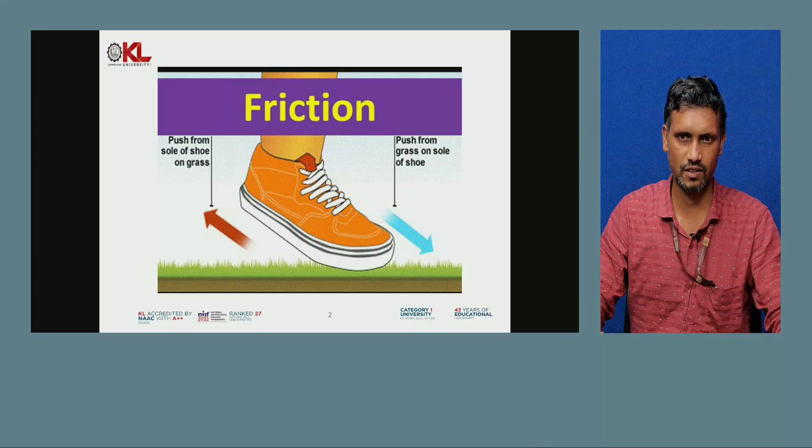Okay, so this is one of the best examples. When you are wearing shoes and moving, what are you actually doing? We are pushing on the earth. Push from grass on sole of shoe, push from sole of shoe on grass. One is action, another is reaction. You are pushing on the grass and in return you are getting a reaction from the grass on your shoes. One is action, one is reaction. Now because of this there will be friction.

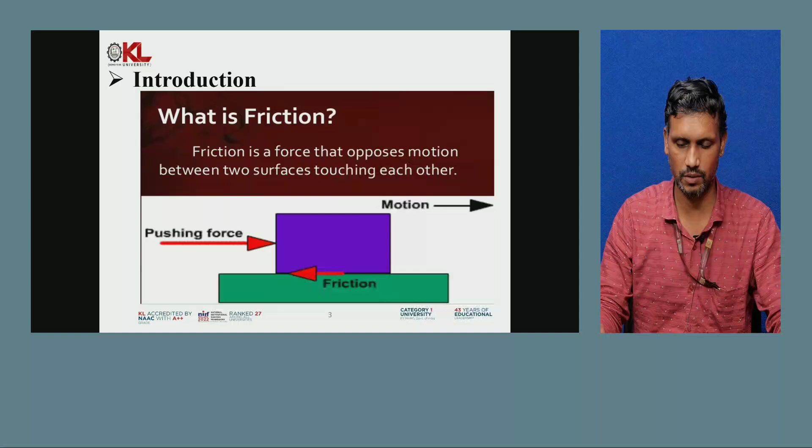Okay, now the cause of friction: it can be due to irregularities, ups and downs, rough surfaces, correct? Surfaces are generally not smooth in reality. There are some ideal conditions which we take for analysis, but actually nothing is smooth. There will always be a little irregularity.

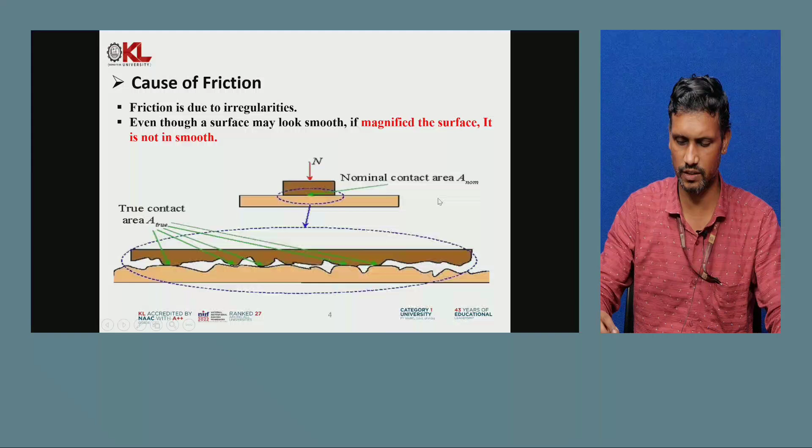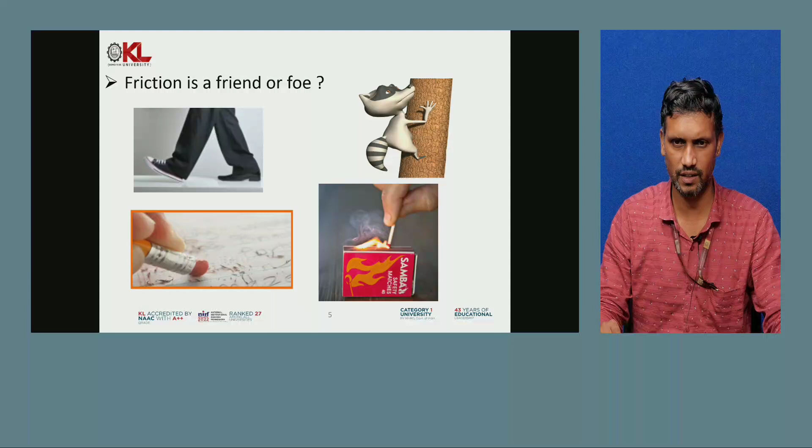So types of friction: there is static friction and kinetic friction. Static means at rest, kinetic means moving. Under kinetic friction there is rolling friction, sliding friction, and fluid friction. Rolling means something is rolling from up to down, correct? Then there is rolling friction. Skates and rollers generate rolling friction.

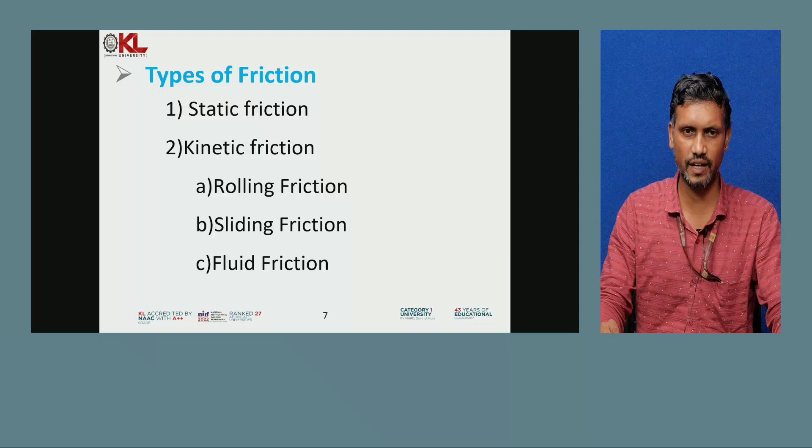Sliding friction means when you slide from somewhere. There are slides in zoos, gardens, parks, correct? So when you slide, there is sliding friction. Then fluid friction: in fluids there are different layers, and in between them there will be friction. Okay, we will see these things later on.

Now there is the law of friction, the law of Coulomb friction. It says the force of friction is proportional to the normal reaction. There is one force and one normal reaction, and both are proportional. When you remove the proportionality, you get a constant known as mu. This symbol is the Greek letter mu. This is known as the coefficient of friction.

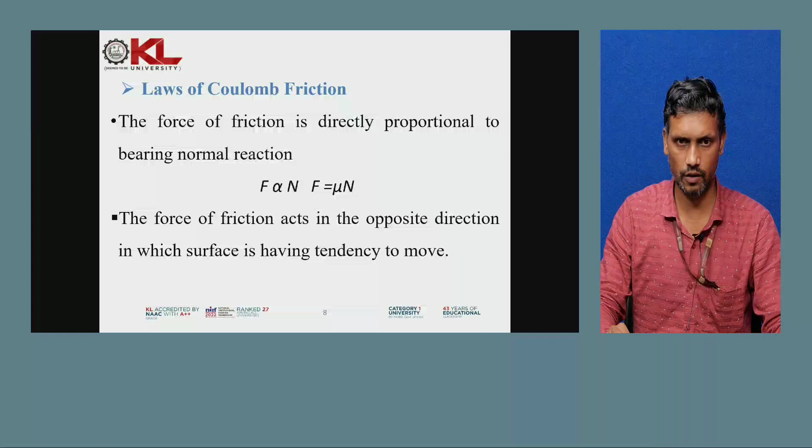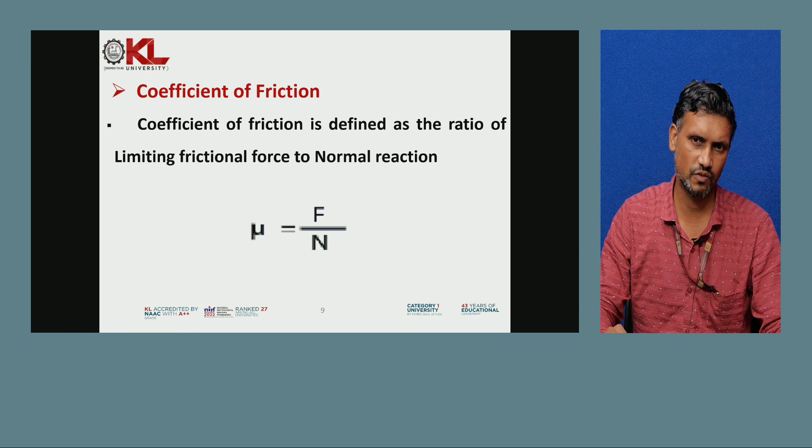Okay, so you get F = μN. So mu will be the ratio of F by N, meaning the ratio of limiting friction force to the normal reaction. This gives you the coefficient of friction. Generally it is less than 1, between 0 and 1.

Okay. Now different zones of friction: the zone of static friction and the zone of kinetic friction. The limit where it changes is known as impending motion. Until impending motion, the body is static. However much force is applied, the body stays static. We represent this by μs, the coefficient of static friction.

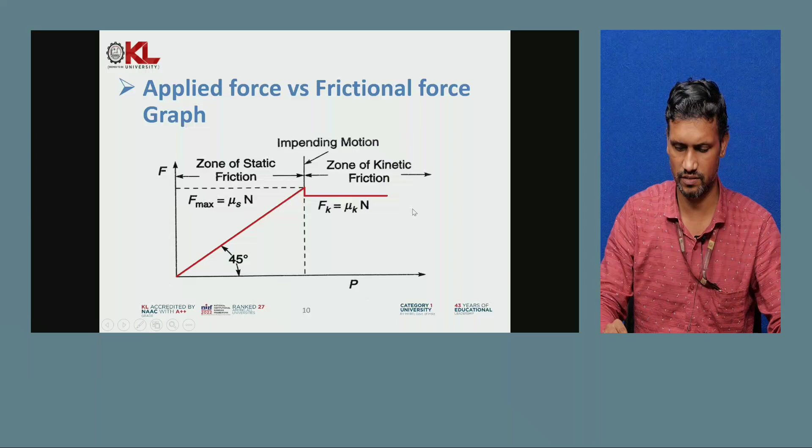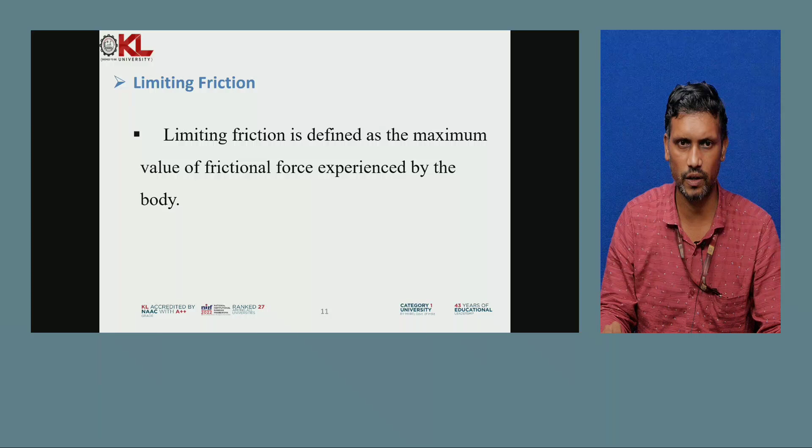Okay. Now what is limiting friction? It is nothing but the maximum value of friction experienced by the body. Maximum value of frictional force experienced by the body. After that the body will start moving.

Now angle of friction. It is nothing but the angle made by the resultant with the normal reaction. Phi, here you can see phi is nothing but the angle of friction between resultant and normal direction. So you will calculate tan phi, which is nothing but F by N, and F is nothing but mu into N. So it will cancel out, simplify, you will get tan phi equals mu.

So coefficient of friction is equal to tangent of angle of friction, phi. So phi you will get as tan inverse of mu. All these things are important during mathematical calculations.

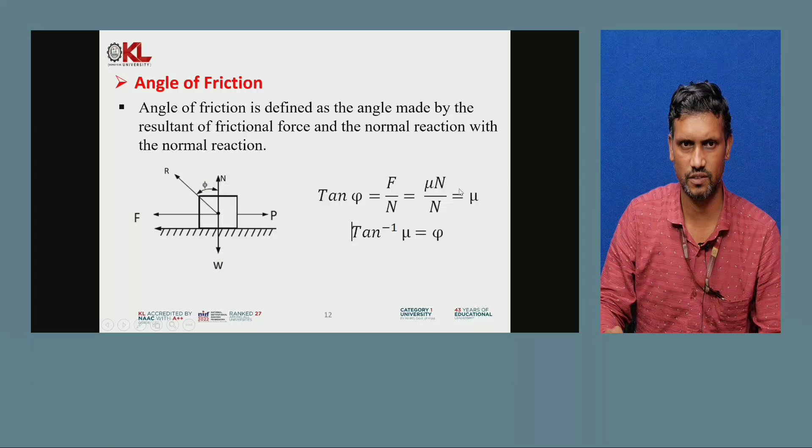Now angle of repose. That was angle of friction, now this is angle of repose. What is angle of repose? It is the angle the inclined plane makes with the horizontal. When? During the motion. The angle between inclined plane and the horizontal during the condition of motion. This is known as angle of repose.

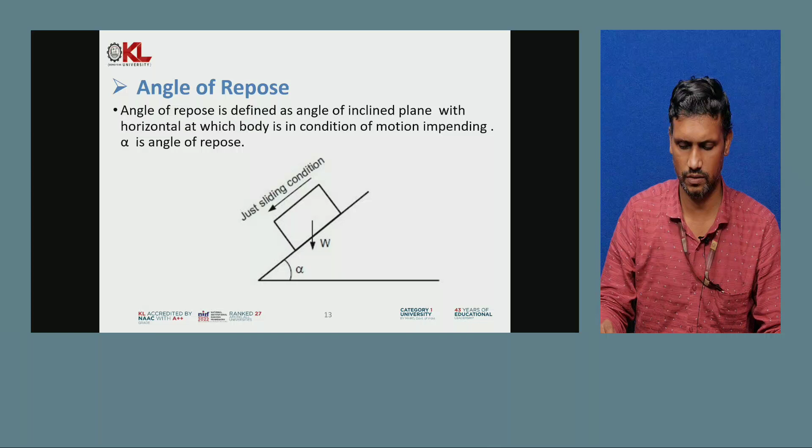Now rolling friction. What is rolling friction? It occurs between surfaces in which one surface will roll. You can see here the example of painting. When you are painting the wall, there is a roller which you are rolling, correct? This will generate rolling friction on the wall, because of which you can apply the paint easily on the wall.

This is important. Okay, so till now you have seen what is friction, what is coefficient of friction, and now you are seeing what is rolling friction, what are the rollers here. Now another is sliding friction. When you are writing with chalk or pen, it is known as sliding friction, because you are sliding one surface on another surface.

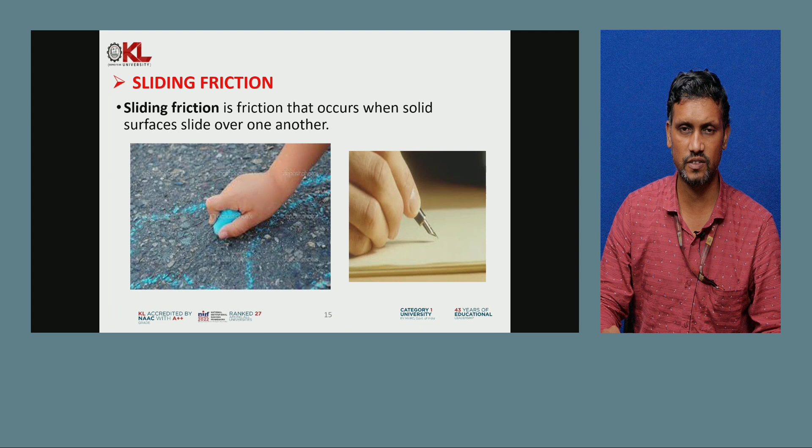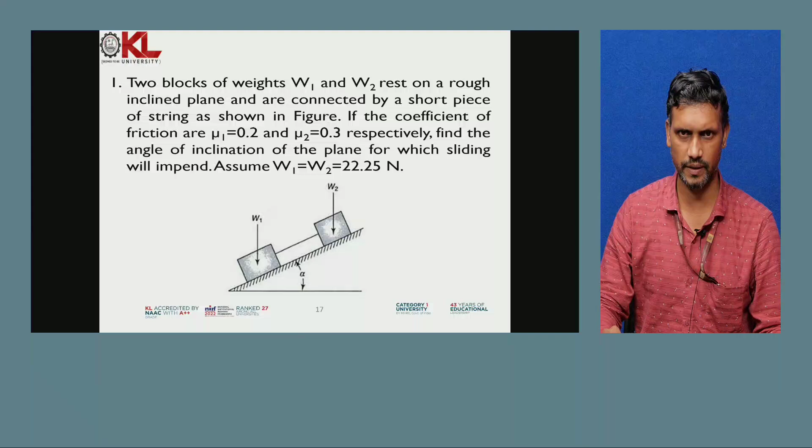Next, different types of problems. See, here there are two bodies which are connected. One is represented by W1, another is represented by W2. Both are on an inclined surface. The inclined surface is making angle alpha with the horizontal. Such kinds of problems we have to solve.

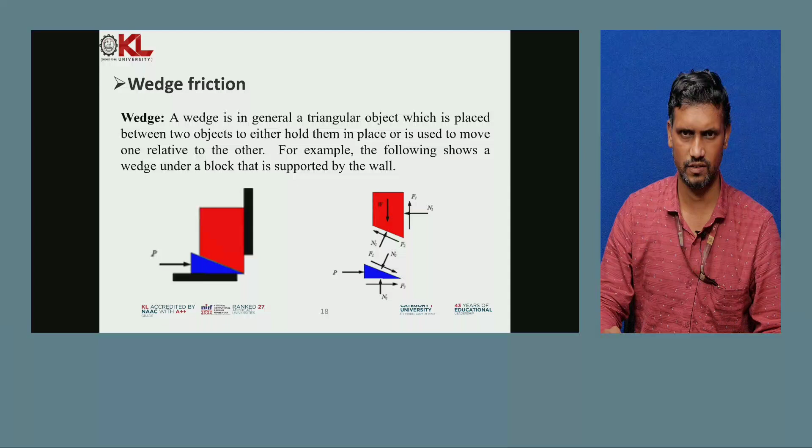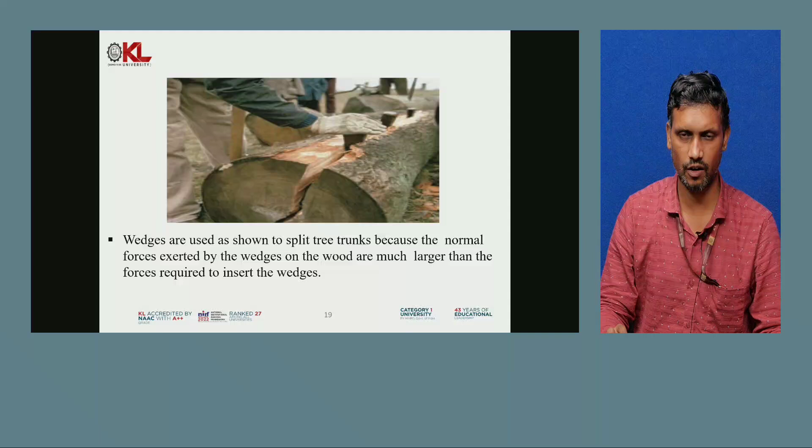Here you can see a hand, and the hand is pressing something. This is a triangular, V-shaped something. This is a wedge. You can see an axe by which you will break the wood. The shape of the axe, that is also a kind of wedge. When you are stopping a car on any slope, on the back side of the tire you will put something to block the motion. It is also treated as a wedge.

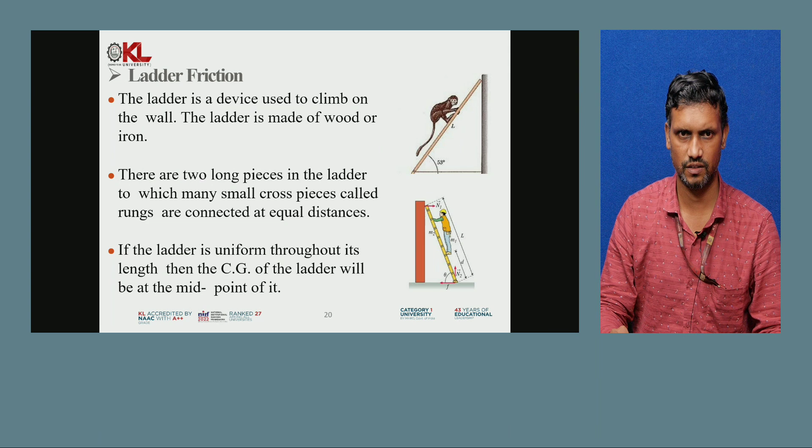Okay. Now, ladder friction. When you are climbing, for example, here a monkey is climbing, or another example, a man is climbing. So this is another example of friction, which is ladder friction. Okay. So like this, there are different types of examples, different frictions.

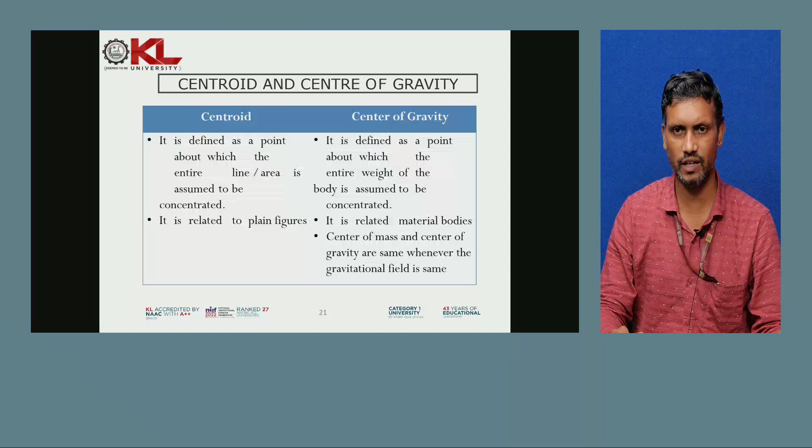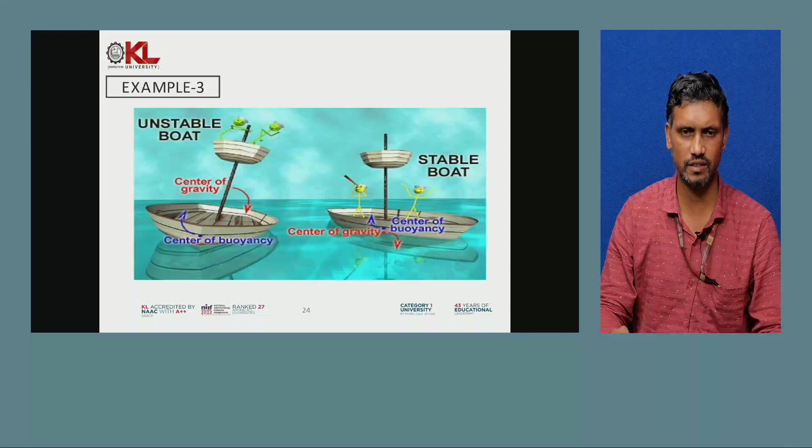Okay. Stable boat, unstable boat. Stable boat means the center of gravity is correct. Unstable means there is some problem with the center of gravity. Okay. Now how to find the center of gravity? These are some formulas.

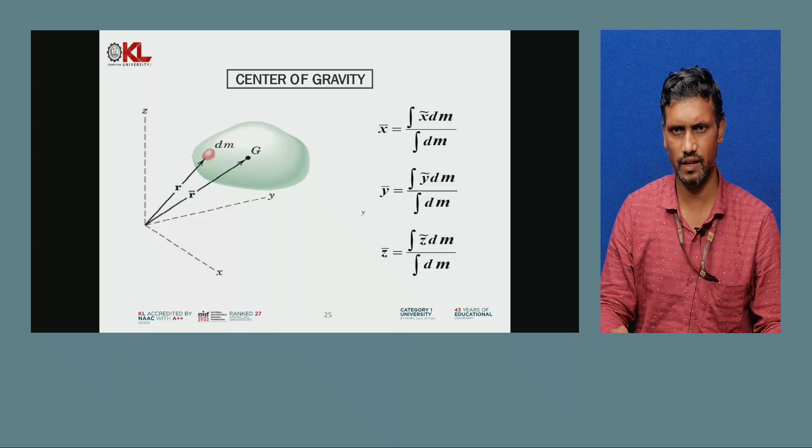In x-axis, y-axis, z-axis, how to find. X is coordinate, dm is nothing but a small amount of mass. So this will be useful afterwards when you are solving the problems during class.

So this is about mass, center of gravity. Now this is center of volume or centroid, here you talk about volume. There was mass, here is volume. In the same way, center of area, here is area.

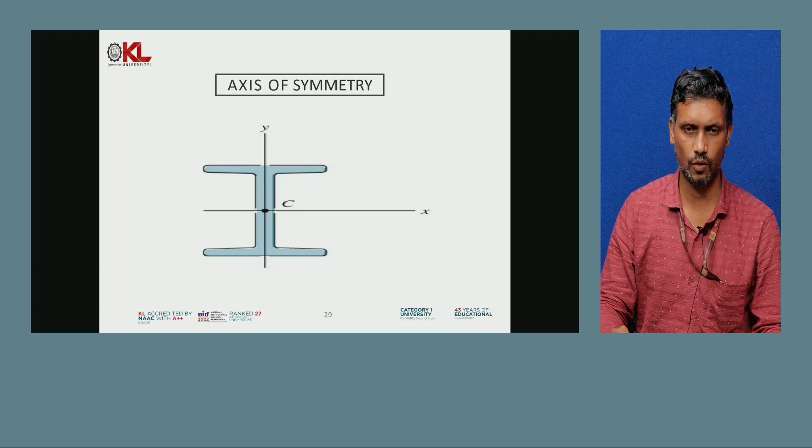Now centroid of some regular or plane figures. Axis symmetry: this body is symmetric about x-axis as well as y-axis, the I section. You can see here, O section, that is also symmetric. Correct.

Now rectangular area. How to find area of rectangle, you know, breadth into height. How to find centroid? Here in this figure, h is height, b is width, and here it's the center C. This is nothing but centroid.

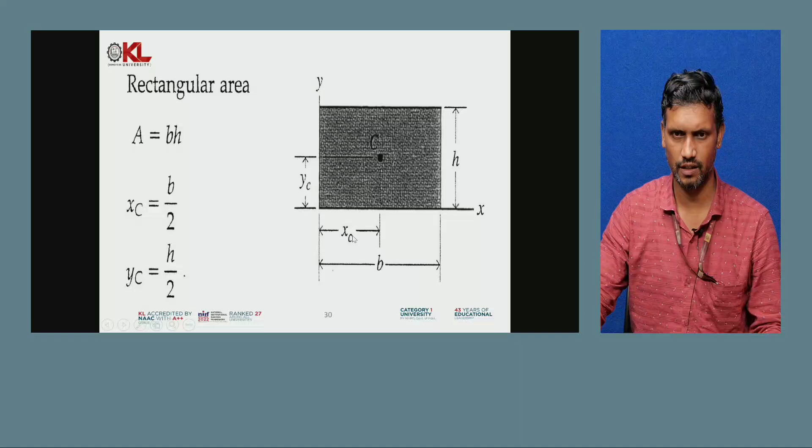Now how to find value of centroid? So for rectangle, half of height will give you value of yc, meaning distance of centroid in vertical direction. Similarly, in horizontal direction we will get xc, half of width b.

Like this, there are some other examples: triangle, semicircular, quadrant. All these things we will discuss in brief afterwards with the class. Just now I am giving you a small glimpse.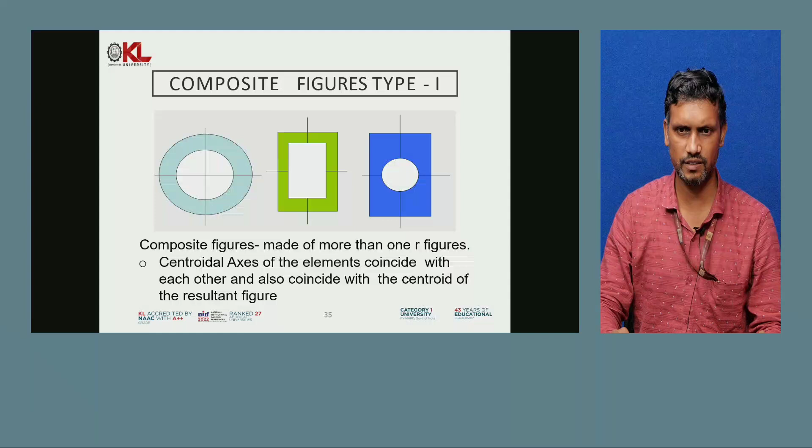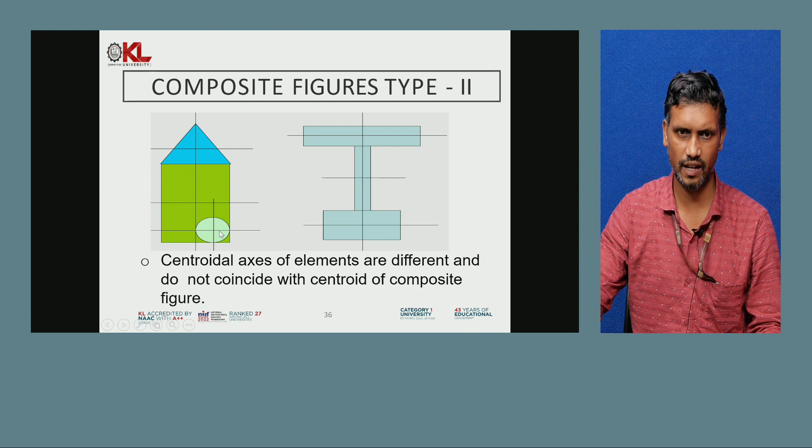These are more examples. Now this one, upside bigger rectangle, downside small rectangle but width is more, in between thin one, vertical. Left side you can see there is a blue color triangle, green color rectangle, and then here circle. So these are some examples of composite figures.

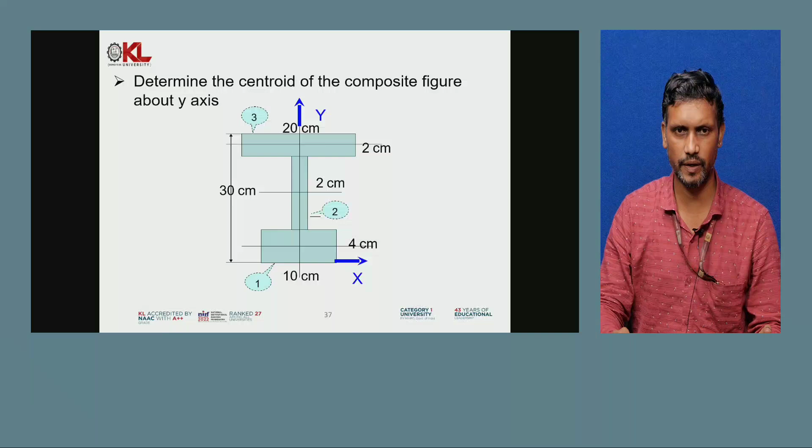So we are going to find how to get centroid for such difficult and composite figures. For simple figures already they are predefined centroid values, but for complex we have to find. Okay, these are some examples.

Now coming to moment of inertia. Till now we talked about centroid, center of gravity. Now moment of inertia - what is the definition of moment of inertia for any area? Centroid for an area is determined by first moment of an area about an axis. How to find it? Second moment of an area is referred as moment of inertia.

How to find moment? I told you, force into distance. Second moment means you take distance squared. Now here it is moment of area. There was force, here it is area, but the format is the same thing, distance and whatever you require. So second moment of area is referred as moment of inertia. You should know this thing.

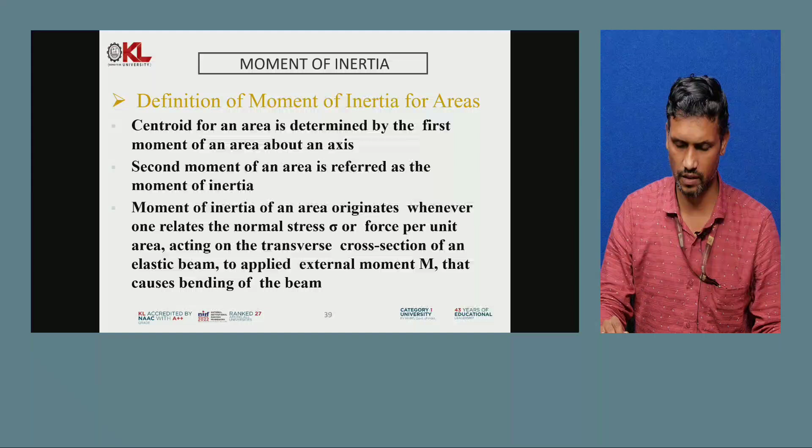Now coming to moment of inertia, how to get it? As I told you, second moment of area is known as moment of inertia. So here you can see dA is small area, distance is from x-axis, distance of dA is y, from y-axis distance of dA is x. So how to get moment of inertia about x-axis, means Ix,

area into y square. If you take area into y, then it is first moment of area. I want second moment of area to get the moment of inertia. Second moment of area means area into distance square. Here distance is y, so area into dA into y square will give you Ix. Similarly, dA into x square will give you Iy.

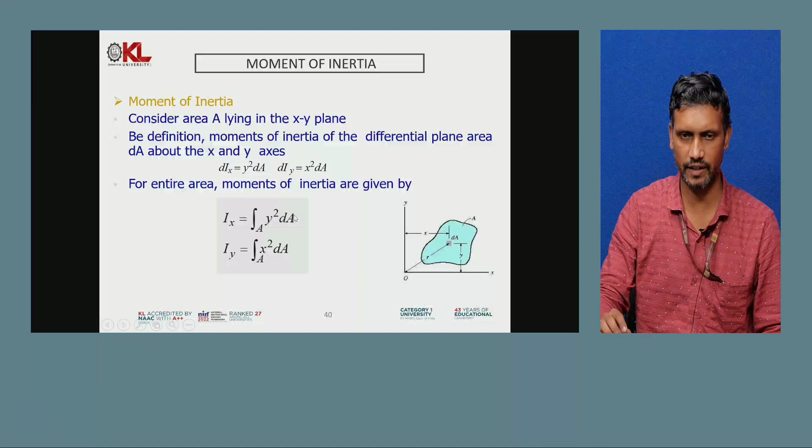But we have to integrate it because there is dA, the differentiation of A. We have to remove this differentiation symbol, so we will integrate over the complete area. Is it clear?

Now this is one theorem, perpendicular axis theorem - when the axes are perpendicular, how to find? For example, there is x, y and z axis. You know moment of inertia about x axis, you know about y axis, you have to find about z axis. So Iz will be equal to Ix plus Iy. Summation of Ix and Iy will give you moment of inertia of the third axis. It is also known as polar moment of inertia.

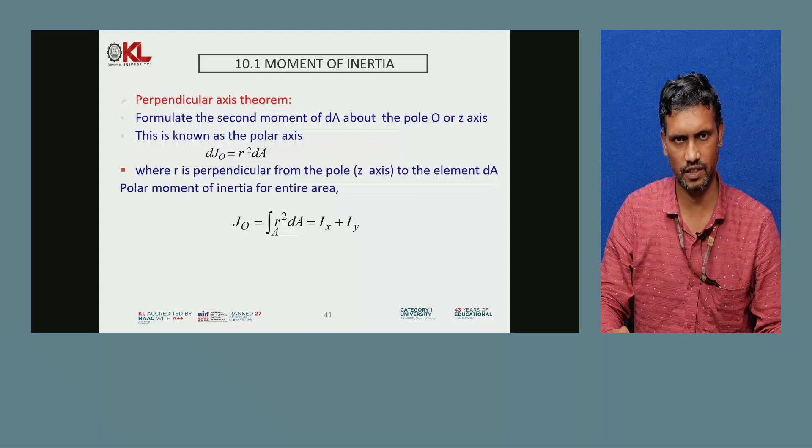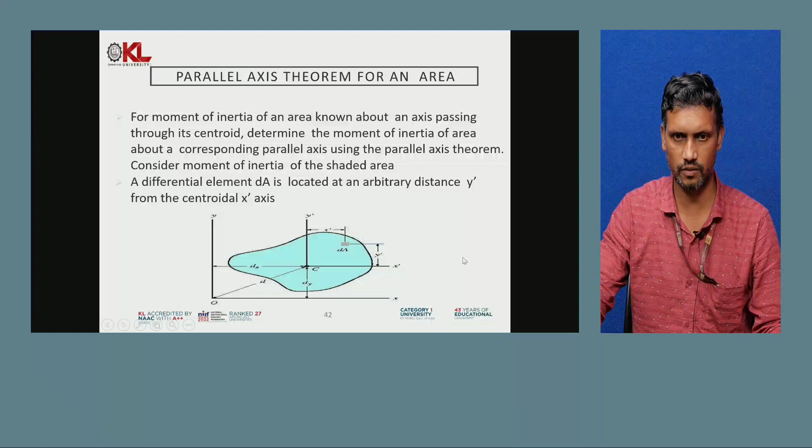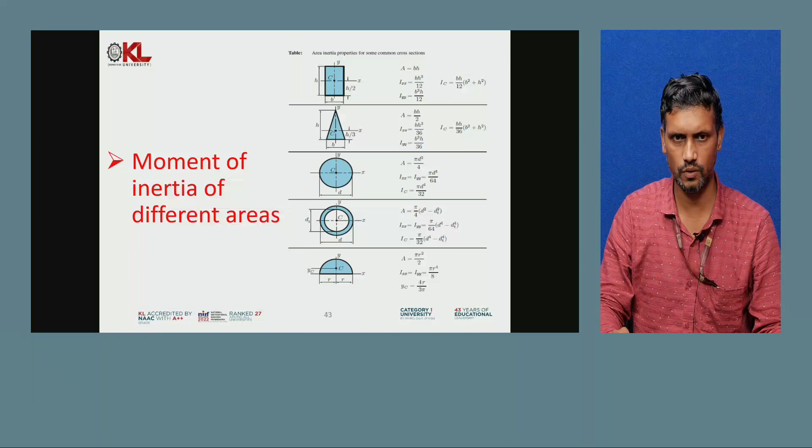Next, parallel axis theorem. You have moment of inertia about one axis. You are drawing a parallel axis about that particular axis, and you have to find moment of inertia about that. For example, x bar is one axis, x is another axis. You know about one, you have to find about another. How to get it? The formulas are there - for different structures there are different formulas. So all these things will be given to you and you will learn this. Okay, these are another examples.

Okay, so friends, this is all about moment of inertia and friction. I hope you understood. If any doubt, you can ask me. Thank you.